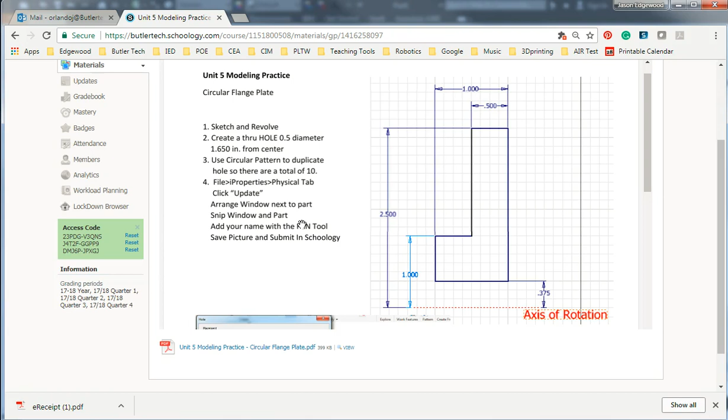Okay, we're going to make the circular flange plate using primarily the revolve tool to create the physical object, and then we'll add the feature of the holes using the circular pattern tool. Okay, so the first way to start is going to make this L-shaped sketch, and then we're going to have this line down below it.

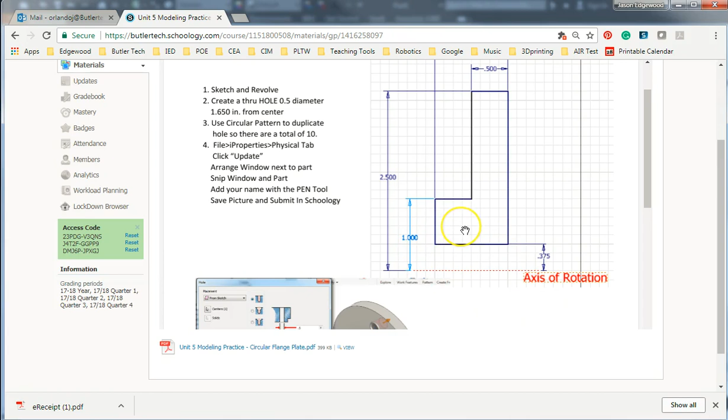It's horizontal, parallel to the bottom of the L, and it's the line that this is going to revolve around. Basically, think of all the points inside this L. Their job when you use a revolve is that whatever distance they are from the axis of rotation, they will maintain that exact distance but spin around the line. And as they spin around, we'll do the join revolve to make material, they'll kind of leave material in its path. Okay, so let's go ahead and make this sketch.

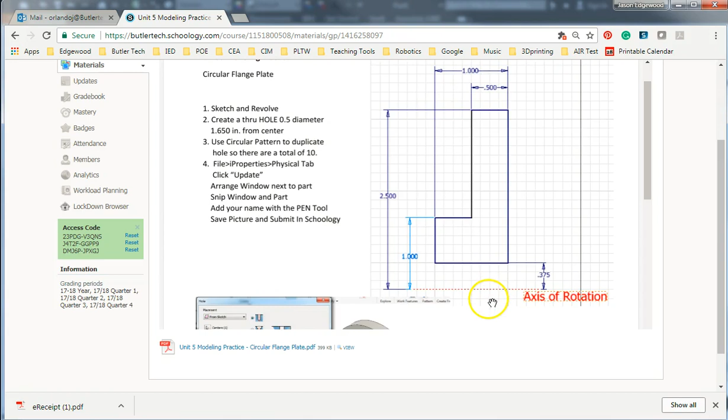Let's make this axis of rotation just a line using the line tool. I made it dashed just so I knew it wasn't part of my profile, but dashed or not is no big deal. It'll still work, and then we'll just apply these different dimensions. Okay, so I'm going to hit start new sketch, and I'll just go ahead and use the line tool. And when I build this, I can do it right here, I guess.

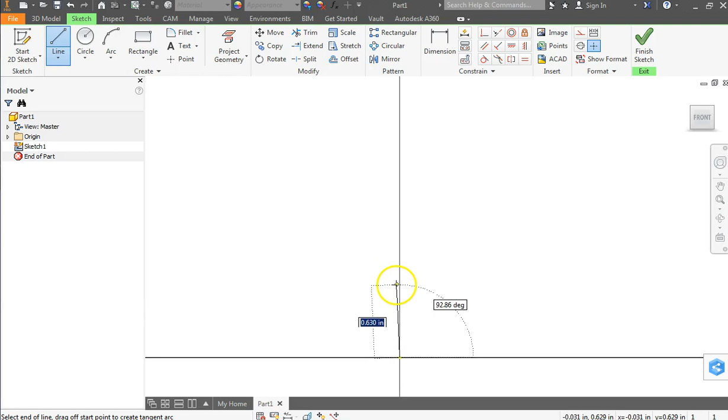I don't have to have the exact dimensions, but I do want to be mindful of approximate dimensions. I don't want to have this zoomed way out where I start sketching this out and I'm at 9 or 10 inches. So be mindful of your dimensions and try to have it close to what it's supposed to be, even if it's a little ballparked, because then when you come back and dimension it, things won't have to move so far to snap into place.

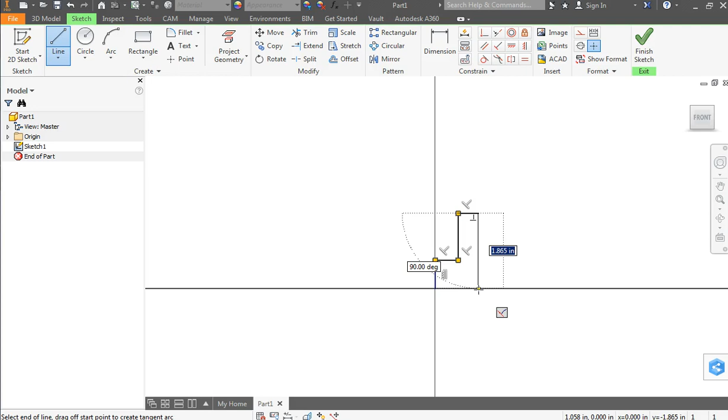I'm being careful right now to get my perpendicular constraints. That's the big thing. Okay, so there's that, and then I'm going to come back and add a line underneath. If you're curious how I made that line a dashed line, you can see this line is not dimensioned. The size of it's not dimensioned, and the position either. I can move it around.

To make it dashed, to call it a construction line, I left-clicked on it so it's highlighted, and then I right-clicked and chose construction. It's still selected right now, so I want to click into the white to deselect it. Okay, so there's just a construction line. And now I'll apply the dimensions. If you need to take a minute and observe those, go ahead and do so.

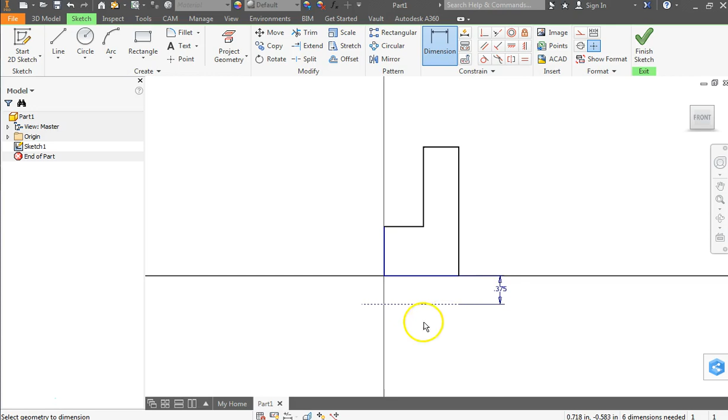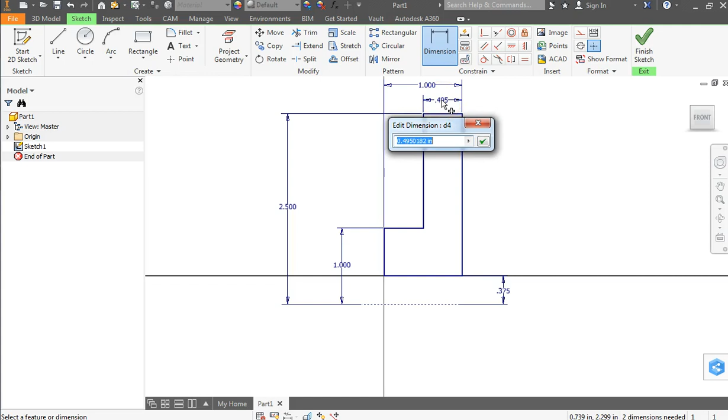Okay, this was 3/8 or 0.375. From here to here was dimensioned to be 1 inch. From here to here was 2.5. The overall width of this shape was 1 inch. And then they dimensioned, I would assume, the contour here to be 1/2 inch. There you go. So our L is the correct dimensions. It should be the correct size. It's also the correct distance from the axis of revolution.

And so now we're going to revolve. All right, I hit finish sketch, and I will choose the revolve tool. The revolve tool includes selecting a profile that will get revolved. Since there's only one closed section, one closed loop, it's already auto selected. And because of that, it auto went to the next choice, which is axis, to say what are you going to spin around.

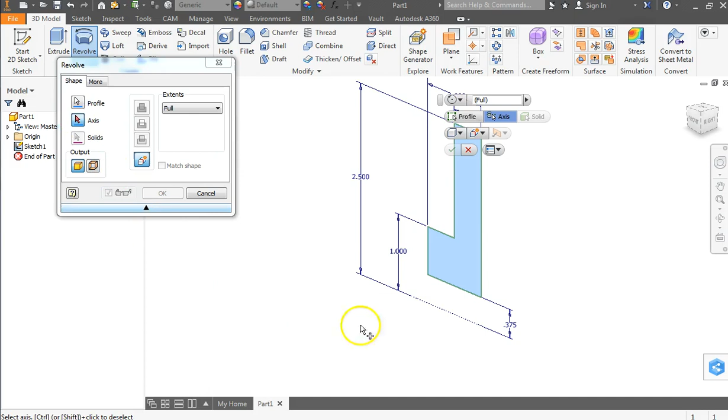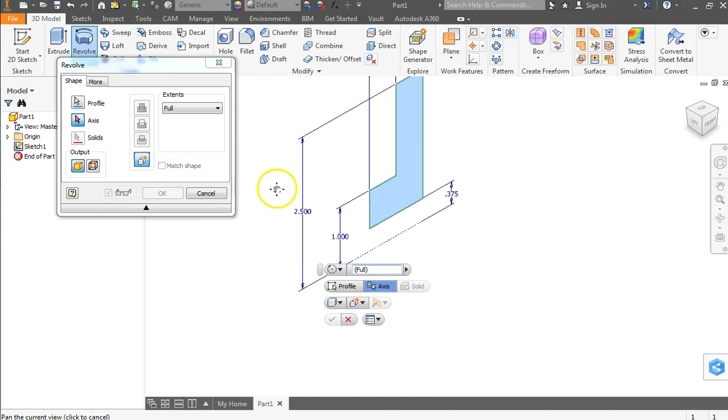Now this is the correct one, we know, but I would encourage you right here to take a minute to play around with choosing other lines and seeing what happens. I have to turn the axis tool on, I can hold the control key and then I can deselect the choice. Right now I'm on the axis, so I can deselect that line and then try choosing something else. Like what if I had chosen that line? I would play around just so you can start to visualize and understand what is happening.

This L shape is spinning around this line. It's kind of like this is the flag, this is a flagpole, it's staying connected, and this is just spinning around, leaving that profile in its wake, and there's what it creates. So I'm going to deselect that one. Instead of this line down here, what if you had chosen the bottom of the L? Looks like a similar shape, but the overall diameter actually gets a little smaller because the points that were the furthest away from what we were revolving around got closer.

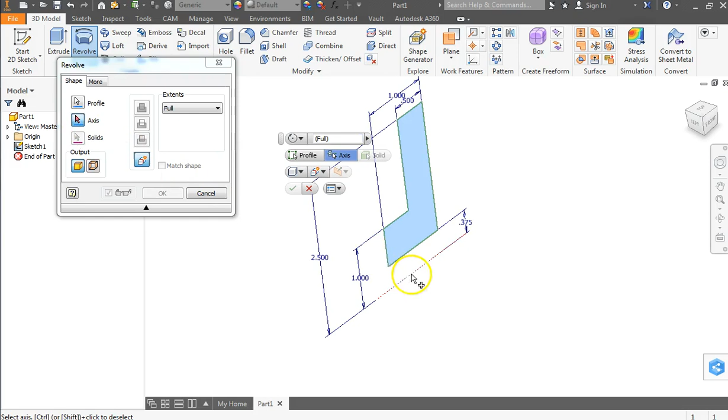Okay, so it's going to be a little smaller, and points from the profile went all the way up to the line, and so those points stay right against the line and we get no hole. Okay, just to go back and compare that to when we chose this one. Okay, it's a little bigger because these points were further from that line, so they make a bigger circle.

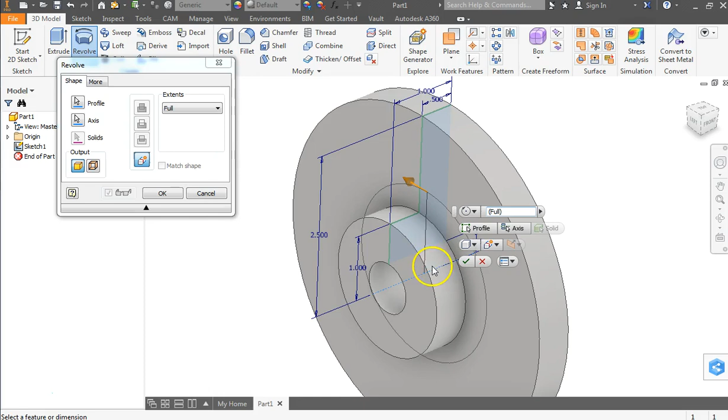And the closest ones weren't on the line, so they maintain that distance, which is off the line, leaving this void, this hole in the middle, right? So we never used the hole tool to create that. We just had a profile that was off of the axis of rotation. Okay, so you can play around there for a minute, but there you go.

The next thing we need to do is we need to create 10 holes. And so I know this is hard to see, but you can zoom in on your computer. I can tell you it's 1.650 is the distance from the center of our feature. And so I'm going to make a sketch, make a point to define a hole. I also can see that it's a through hole with a diameter of 0.5.

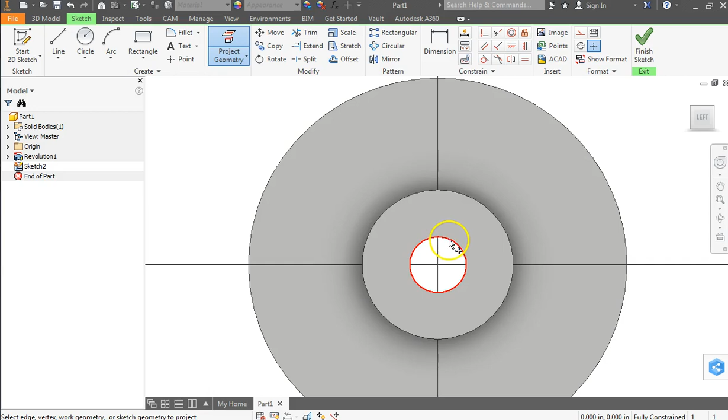So we're going to start a sketch on this face. I'm going to project geometry of the circle, any of these circles actually, just so I get a center point that I can reference. And then I'm going to use the point tool. I want to make sure I'm straight up from that. I'll use the dimension tool to go from here to the center. It was 1.650, and that's it for the sketch.

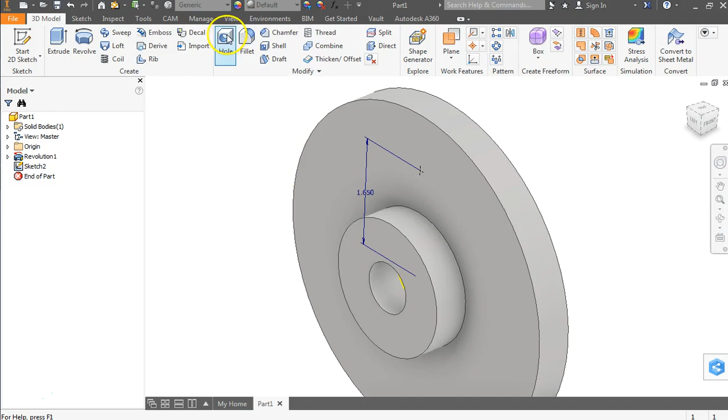To create the hole, I'll then use the hole tool in the 3D model tab. Hole, we said it was a 1/2 inch diameter, and it was supposed to go all the way through, which it's already set to here, the termination through all. Okay. Lastly, we want to now duplicate that in a circular pattern so that there are a total of 10.

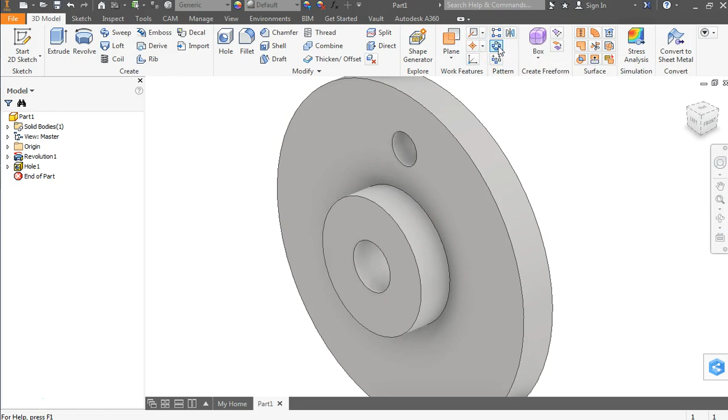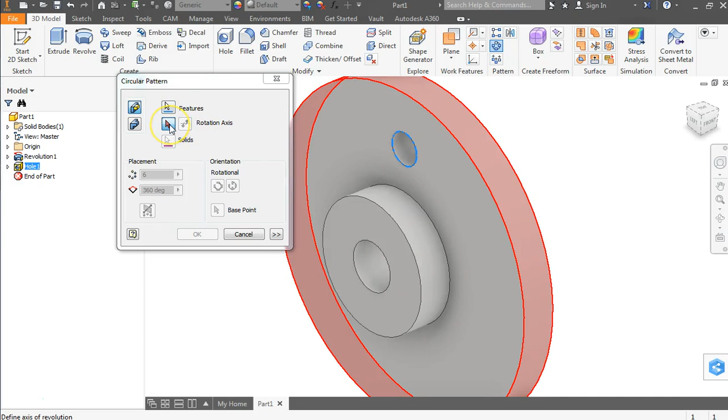And in our pattern panel, there is the circular pattern tool. To use that, we're going to first choose the feature that we want to pattern, so it's that hole. Next, I come over here and say I'm going to choose what to spin around. Now, there's no axis running through the middle, but if you choose a cylindrical kind of hole or object, Inventor automatically thinks you want to spin around it, because they know we're looking for a rotational axis, and it'll just create the center line right down through the middle of that cylinder, like that.

Okay, and then the placement here, this is the total that you'll have in the end, including the original. We wanted a total of 10 spun evenly around a full circle, 360 degrees, and that's that. So our part's done. As a side note though, real quick, if you want to know another way to put that axis that's going to go right through the middle, under work features we have work planes and work axes. There's not the word there, my menu is a little condensed, but this feature is a work axis.

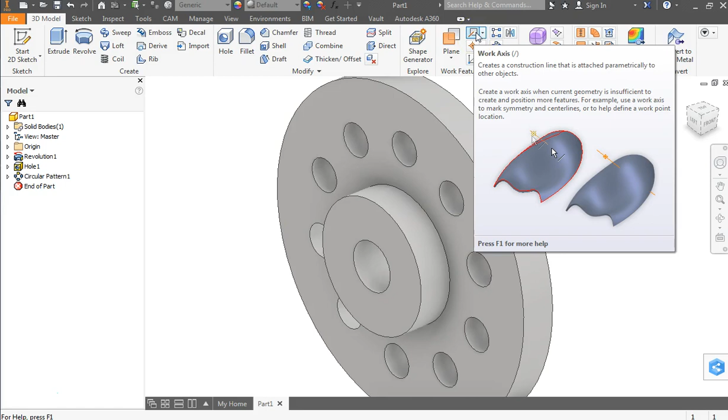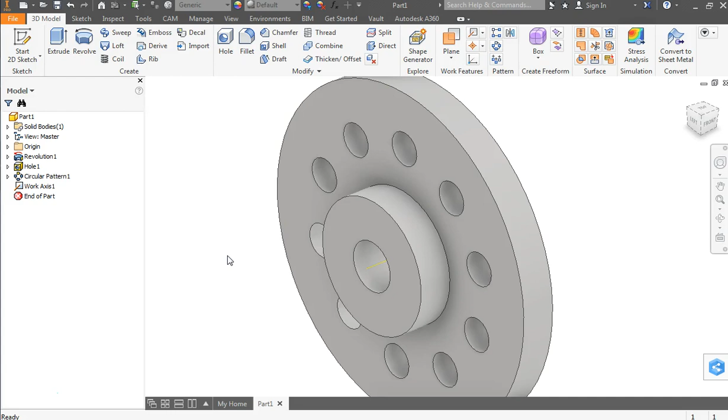Axes are lines. The arrow next to it is a drop down, and there is the last one here, looks like a cylinder. It says basically it's going to create an axis through a revolved face or feature. So if you had chosen that and then chosen any of these cylindrical profiles, you'll get that work axis right down the middle. So you could have done that before using the circular pattern tool as well, just to make sure that the line that you wanted to spin the feature around was there. Okay? Alright, I'm going to just hit back because I don't need that.

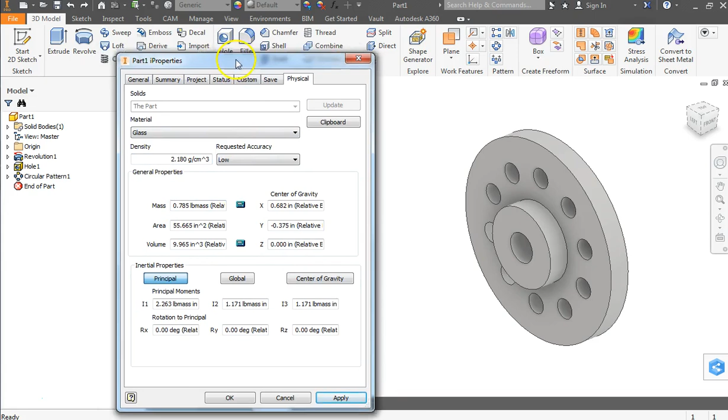And then to submit it, I want you to go to File, iProperties, go to the Physical tab. I want to see these values calculated, so hit Update, and it will calculate the area, the volume, the mass. The mass is just generic right now. We haven't picked a material, but if you choose an actual material, let's change it to glass, for example, then this will get calculated.

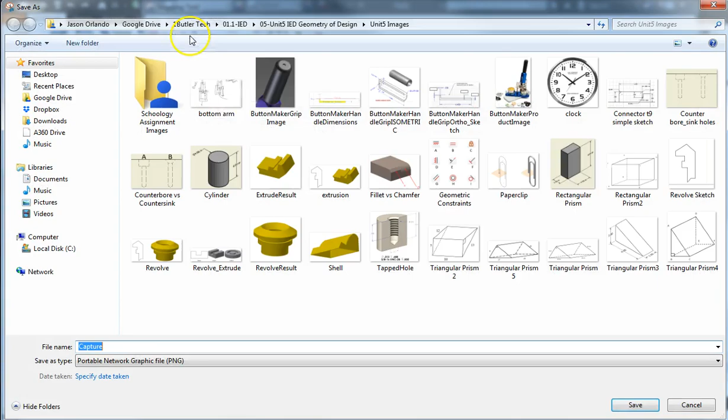Okay, so I want you to bring this next to your part and then use your snipping tool, okay, just to get a picture of just the part and the iProperties window. You can use the pen tool to go ahead and put your name on here. Okay. Hit the save button, save that picture somewhere, and then go submit that into Schoology.